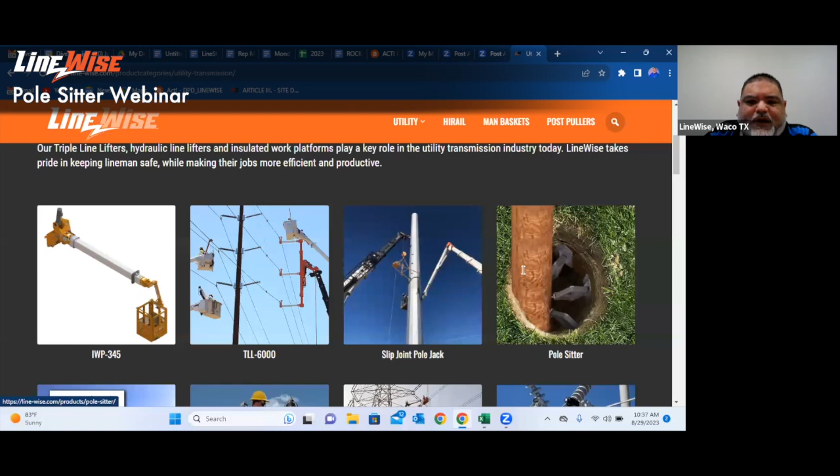If you haven't heard me say this before, you'll hear it today, and I'll say it quite often. LineWise does not come up with its own products by itself. We depend on electric utilities, electric utility contractors, people from the different various parts of this industry who have problems they run into, and then they call us and say, Noah, we got a problem, can you help us with it? And we're like, sure, what do you want to do?

In some cases, the line crew has already had the product put together in some way or another, but needed the engineering personnel to be able to complete the product. In this case, it was more of the other option, where the superintendent, who is very creative, comes up with his own tools when needed, had this need and came up with this product, and then came to us and said, Noah, I need to come up with an engineered version of what I came up with. So here was the story.

As you can see, as the description underneath pole sitter says, start tomorrow today with the LineWise pole sitter. That was something he had said: I need to get stuff done today that's going to save me on my outage tomorrow. They were giving him so many hours in his particular part of the country, which is Arizona, to take out the lines, and then he was going to have to come back the next day, and he just didn't have enough time to do everything he had to do.

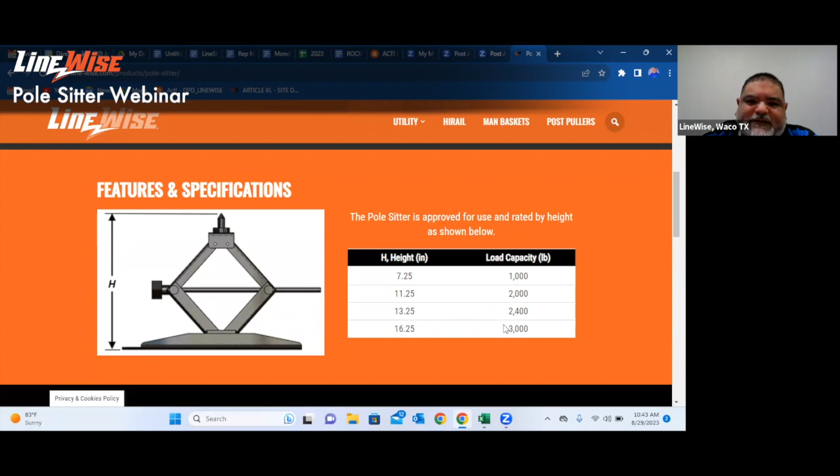But this is the brochure. It has the same picture off of the website. And then off the back here, it gives you some more photos of kind of what this looks like.

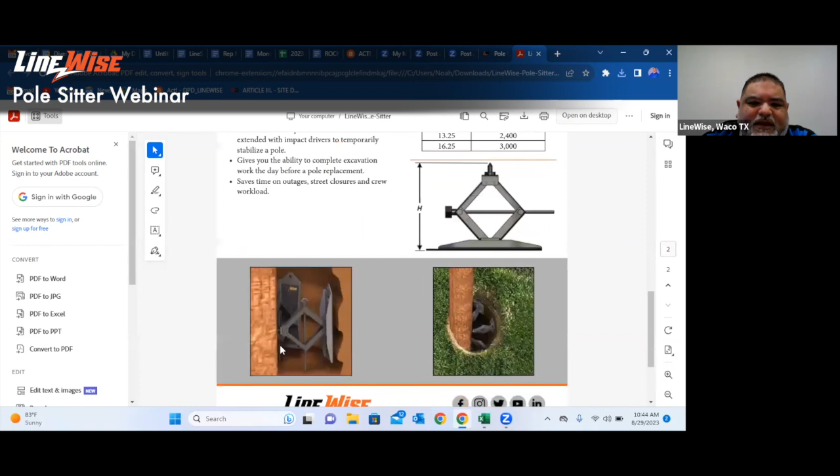So we've covered this section here in the mid right. The picture on the low right, we've kind of talked about. This right here is giving you a section view of what it might look like down in the hole.

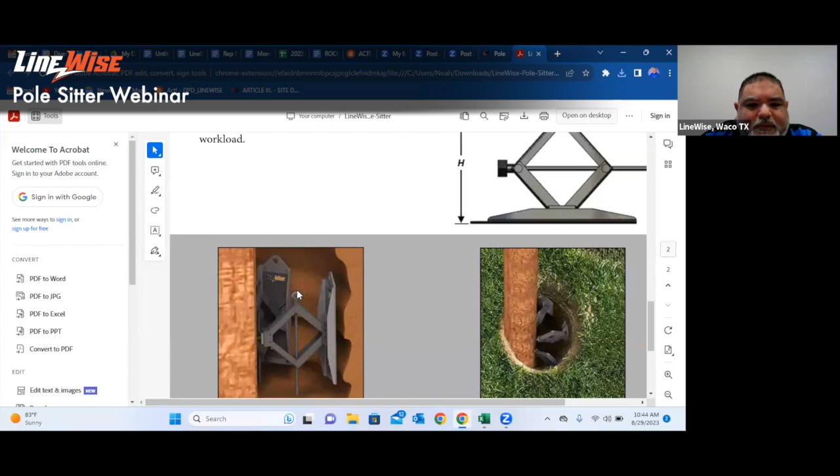You're muted, Noah. Noah, you're on mute, sir.

I'm not sure how I muted myself, but I did. Okay. Thank you for whoever shared that. I didn't see you shared it, but thank you very much.

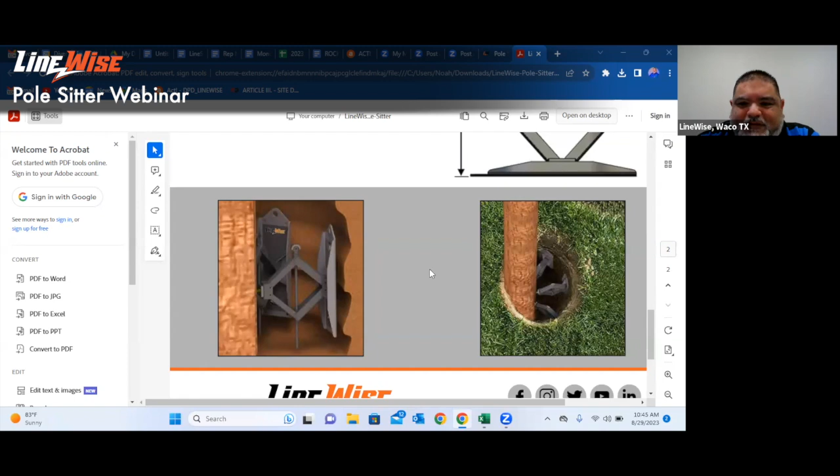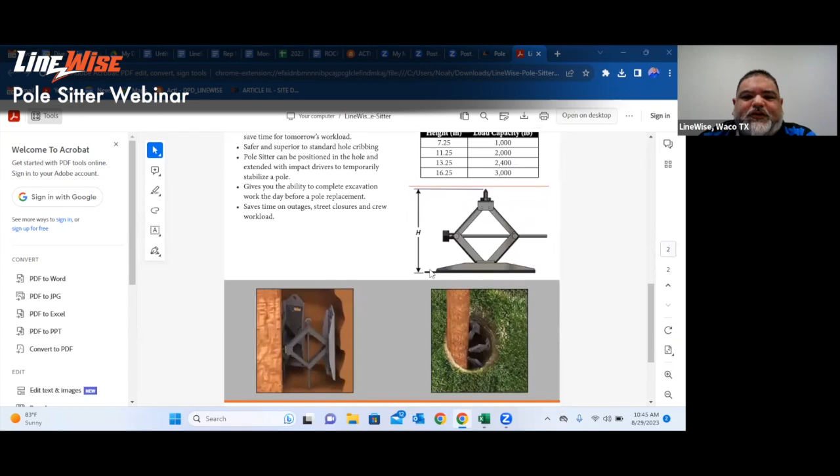So I'm not sure how much you've missed, so I'm going to come back and cover the brochure part a little bit more. The brochure can be downloaded from our website. If you're a reseller, you can get that and share it with your customers. If you're not a reseller, distributor, or manufacturer's rep, but you're a customer that might buy this product, you can download it from our website and share it with your counterparts or whoever you want to show it to.

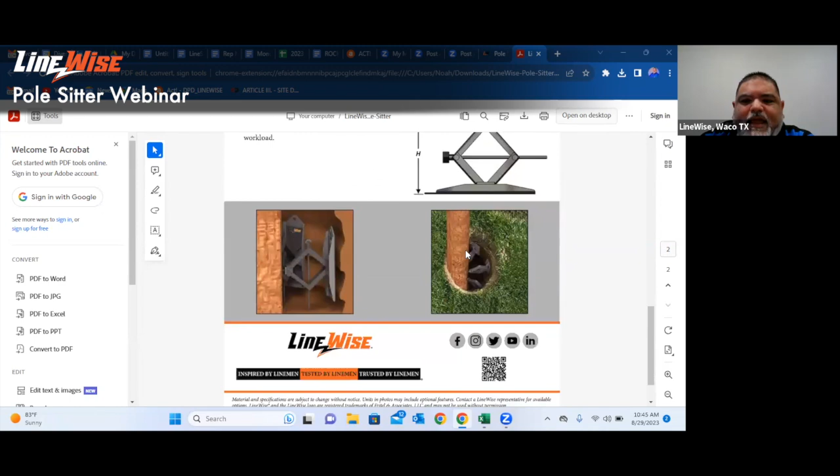We've already covered this section right here pertaining to the capacity and the picture on the lower right. This right here is a cutaway section that we have to show the jack down in the ground. You can see this one on the back side.

Like I said, there would be a total of 3 in the hole. This is the one in the middle, and the one you can't see is the one closest to us. Here is the base plate of the jack that is pressing up against the back of the hole here.

And I was saying socket earlier. I believe this may be some kind of different connection. Now, if I remember correctly -- and I don't even remember the name of the term for this piece -- but it's basically round with the hole going through it. It's to help hold the jack as you're going through it.

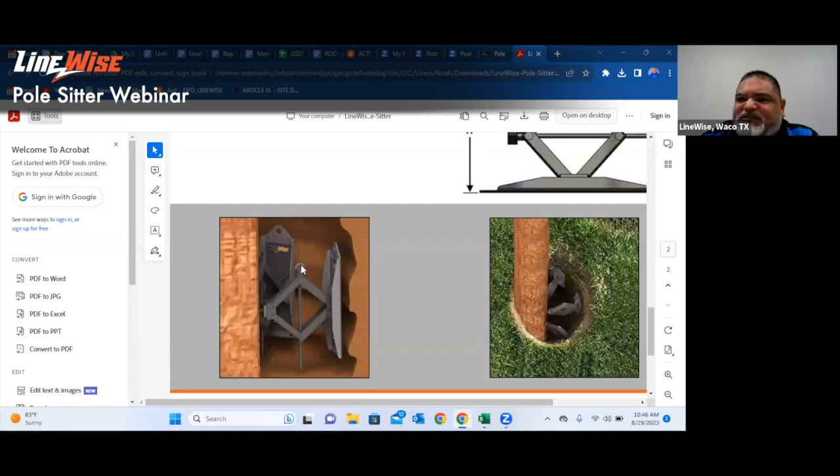And for lack of a better explanation, if you had a socket or a nut on there, as the first version did, which is shown right here, then you're going to have a second form of holding it, which is what this hole at the top here in this picture was intended for -- to be able to tie a piece of rope or something around there and then lower it into the hole.

In this case, you can come up with an attachment that would attach to the end of your extension on your impact driver, and that would go through this horizontal hole here, and then it's all supported by lowering the extension with the jack up at the top down lower, and then now you can just drive it, and it's going to turn and extend the jack out to where it hits the pole.

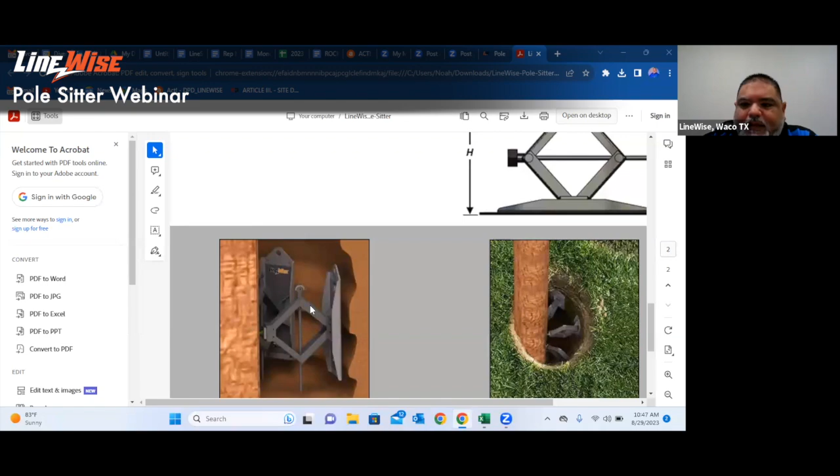Hopefully that makes sense. If not, we're going to have a chance for some questions here in a minute, and then we can explain it further if it doesn't. And again, no question is a dumb question, because somebody else may be having that exact same question that you have.

But that there is the brochure. Now, let's see here. I'm going to close the brochure for now.

And what I want to show you here on the screen -- can y'all see me on the screen by any chance? Yes. Good. So then, if you can see me, I'm going to stop the share for now because I want to show this jack. I want it to be the number one thing here. Give me a second as I figure this thing out.

Stop share. All right, so this here is the jack. Let me try to hold it at an angle where you can see it. So this here is the base plate on the end right here. And this thing probably weighs like 30 pounds. So this is like a profile view of it here.

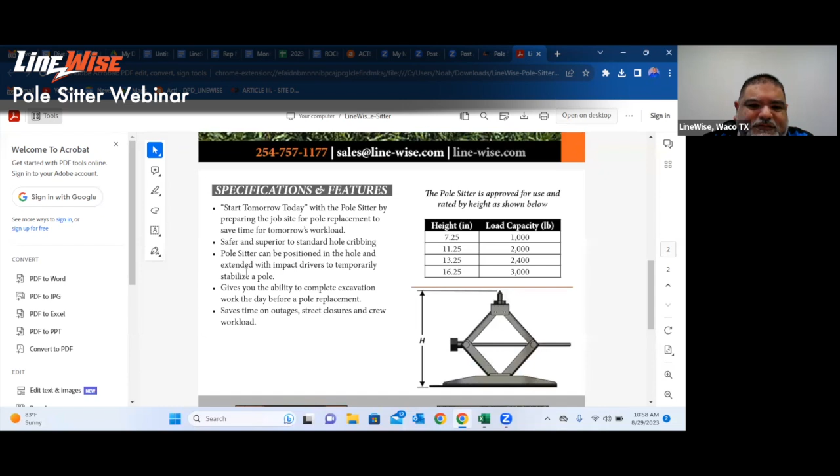This gives you the ability to complete excavation work the day before the pole replacement, saving time on outages, street closures, and crew workload. It doesn't show anywhere how far it's going down - that's something we need to add. But I'd say your safe point is going to be about midway down. So if they've dug down, using this as an example, 8 foot, then they should go down at least about 4 foot into the hole.

And what do we got to hold it 4 feet down in the hole, as far as the Pole Sitter itself? The hole there on the top - because when this is retracted, it's going to be more about the center of gravity, so it's not going to want to tilt forward as it would if it was extending out.

So imagine this completely retracted. This hole at the top here - what he was doing was tying a rope onto it and then lowering it down one at a time. And then while it was sitting there, you would drive out the jack to catch the pole. At that point, you didn't have to hold the jack anymore on this one, and then you would do it here on this one, and so on.

With the new design, this piece here is no longer - I forgot the term I was using - but it's not like a socket where you have to have a socket from a tool go on over this. It's more of a round flat edge like you see here, and then it comes down over it, and that's how you'd engage it to be able to turn this and extend it out.